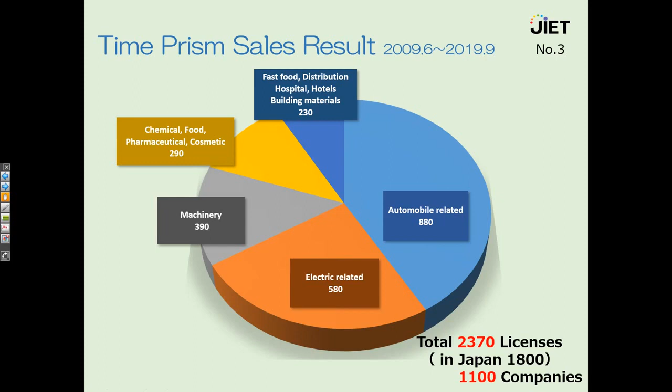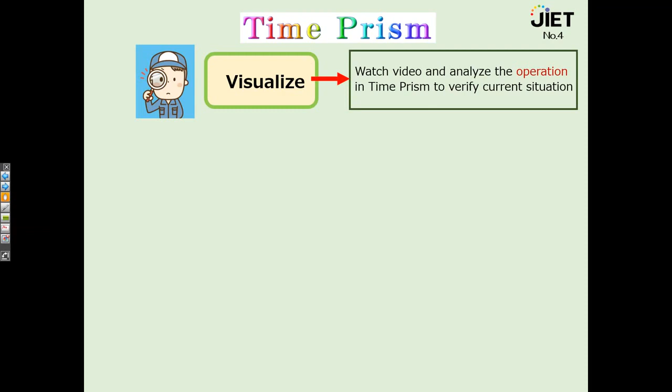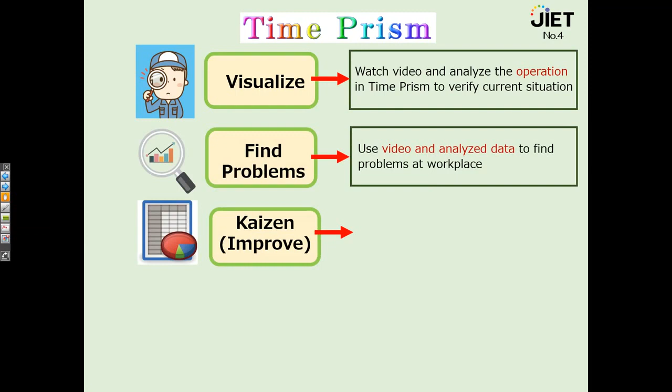How do we use Time Prism? First, visualize: watch video and analyze to check the current situation. Second, find problems: see the video and graphs to find problems. Third, improvement: use video and data to do simulation to improve.

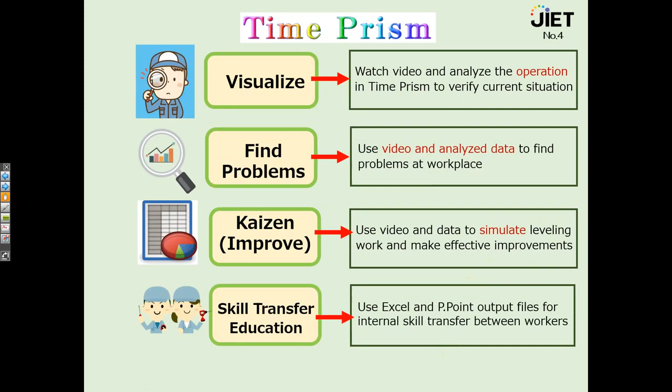Plus, one more important function of Time Prism is we can use it for internal skill transfer and education. I will show you its detail later.

Improvement process: first, take video of operation. Second, upload video to Time Prism. Third, analyze work element - this is very important. Fourth, classify. Once these steps have been accurately done, you have only to use the function of Time Prism.

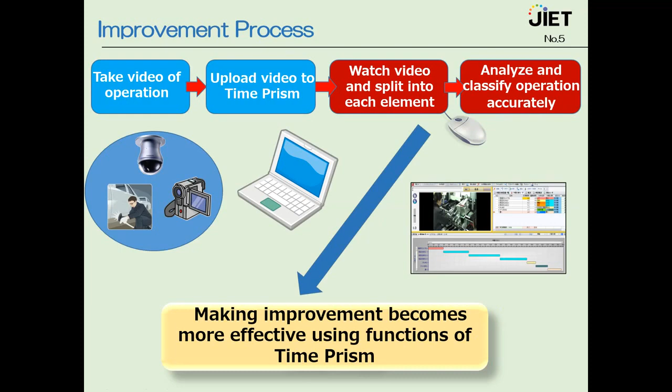Its functions are: number one, comparative verification, to compare two personnel or two operations by a side-by-side screen. Number two, work organization, to simulate and analyze for operation leveling. Number three, man-machine chart, to produce a standard work combination table easily. Number four, output files - over 30 kinds of files are available to output in Excel and PowerPoint format.

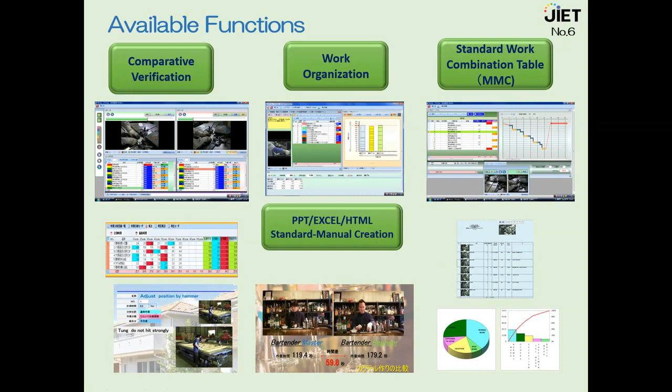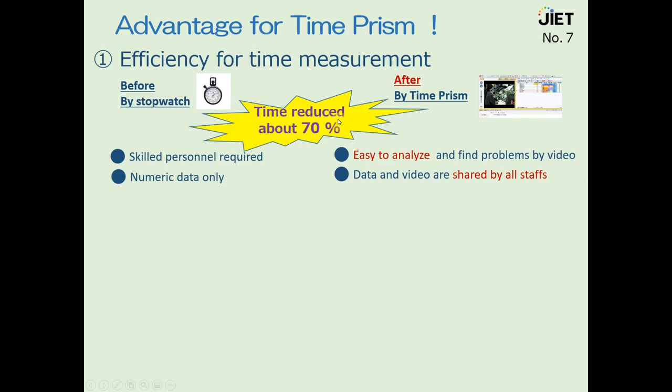Advantages of Time Prism: number one, effective analysis - the time for analysis becomes almost one third, and analysis is very accurate. Number two, easy creation of files - users can create various files easily.

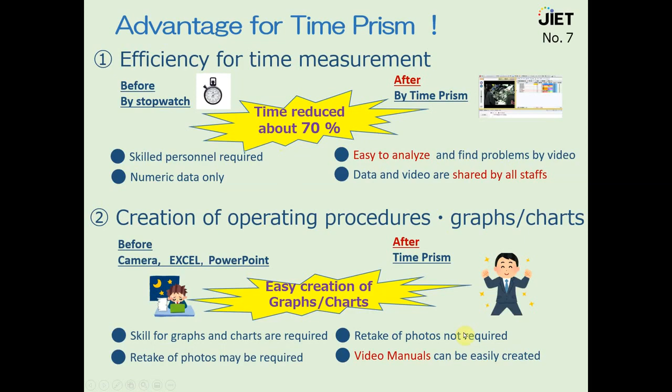Number three, this is the most important advantage: the reduction of losses. Depending on industry, losses have to be reduced or identified. Users should find a fatal loss to reduce and decide the target for Kaizen.

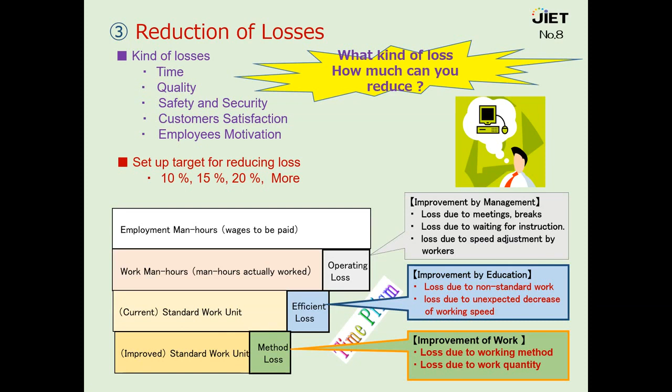I will explain the function of work analysis. Starting up Time Prism, a very simple screen with 3 buttons appears.

The red button is for analysis and normal output. The green button is for a new function, then simulation. And the right button is for initial setting. Click on the red button to start.

I prepared a video of PC assembling. Three ladies, Miss A, B, and C, are working together, and I'll use Miss B for today's demo. The video is now uploaded to Time Prism.

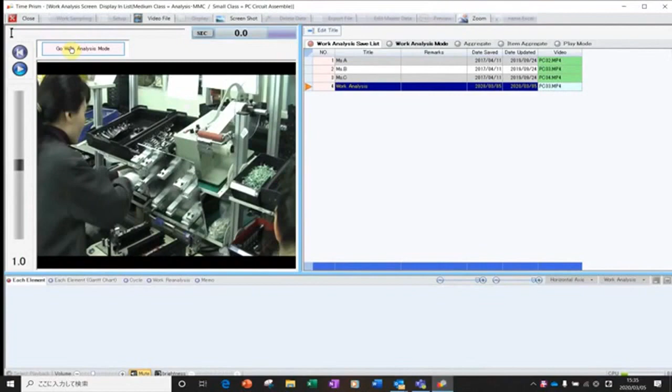Click on Start button, then the clock starts - this is a playtime. To start time measurement, place the cursor on the image and click.

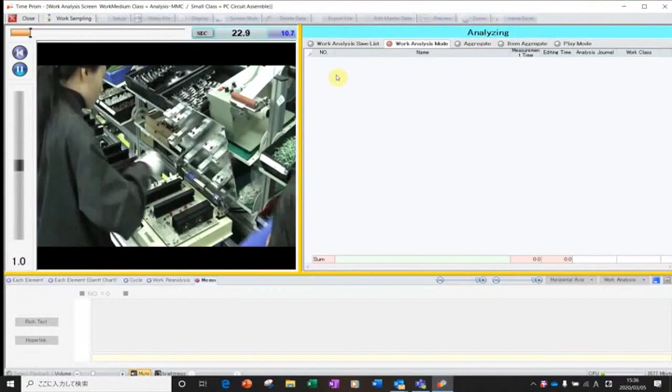Then another clock starts - this is the measurement time, and the analyzing sign is on. To stop the measurement, place the cursor again on the image and click. The measured time is shown here.

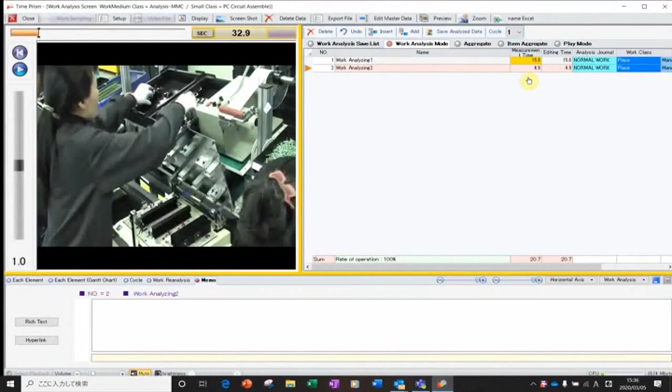15.8 seconds. I'll do it again - click, measurement starts, and click. Measured time is displayed here: 4.9 seconds. This way, measurement times by click operations are accumulated.

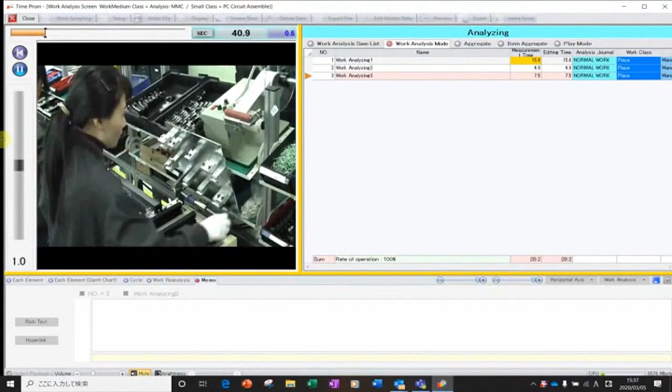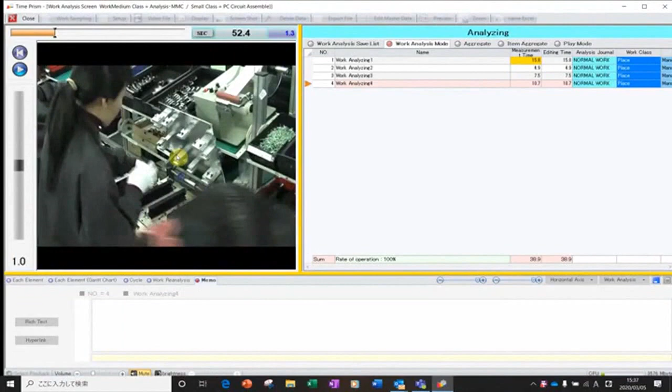Slow motion replay is available up to 0.1 times speed, and fast forward replay up to 8 times speed. Touching the mouse wheel here, you can stop the video during measurement and scroll back and forth to pick the right position to click.

Click on delete if you made a mistake, and you can undo the deleted element. This way, anyone can do the same time measurement very quickly and accurately by mouse click instead of a stopwatch.

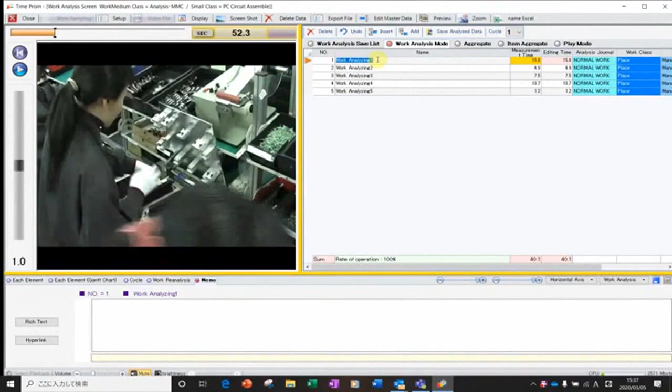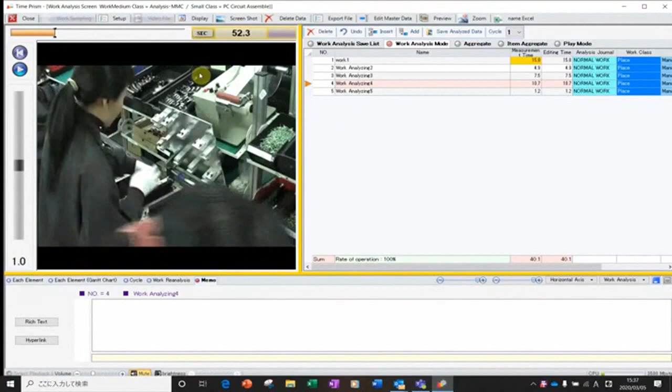I will carefully measure this video image again from the beginning using these functions. The video is in the middle of operation.

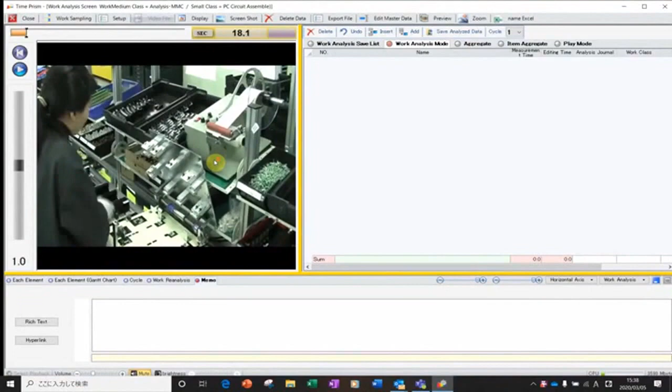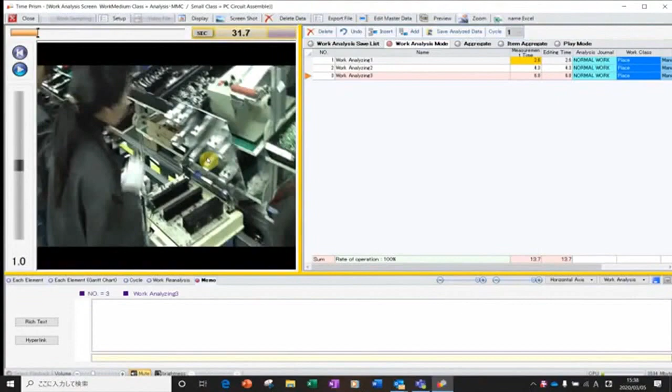Install third parts. Caulk, label, and remove the board. Operation starts here - click. Set the board. Install first parts. Second parts. Third parts. Caulk, label, and remove the board.

The video was split into 7 work elements with a simple click operation. Frame by frame playback and rewinding are controlled with the mouse wheel, so the measurements are very accurate.

What you should do next is input the name of the work. You can input it directly or copy and paste from your Excel file.

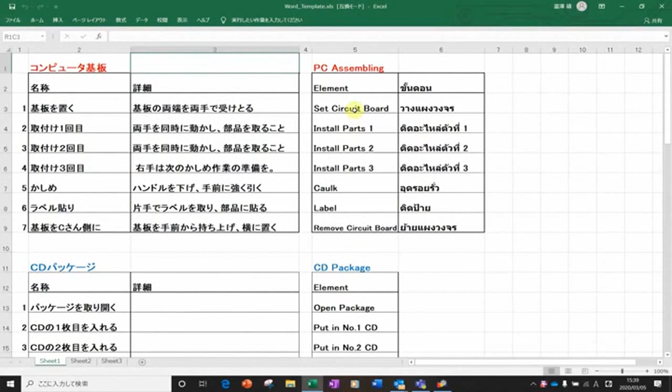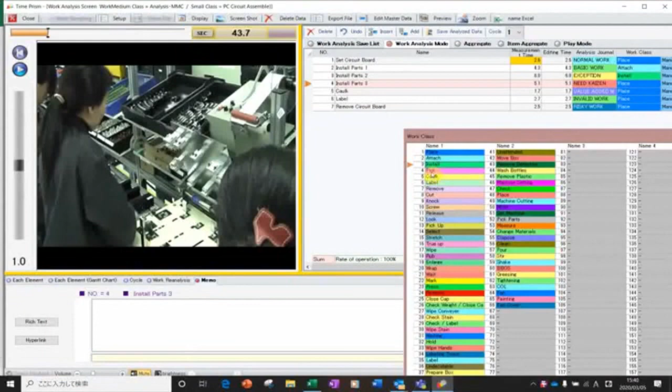Clicking here, Analysis Journal on the first element, a box with 9 analysis journals appears. Users can put in their own sorting names in advance. Clicking on Work class, a box with 200 work classes appears, and users can also input their own names of works up to 200.

Click on Next Group in case the user makes a man-machine chart. You can pick up one from 3 items: normal work, wait, and walk. This way you can sort out all work elements and separate them by color in a short time.

This is almost all which you should do. Once this job is properly done, we have only to utilize the function of Time Prism.

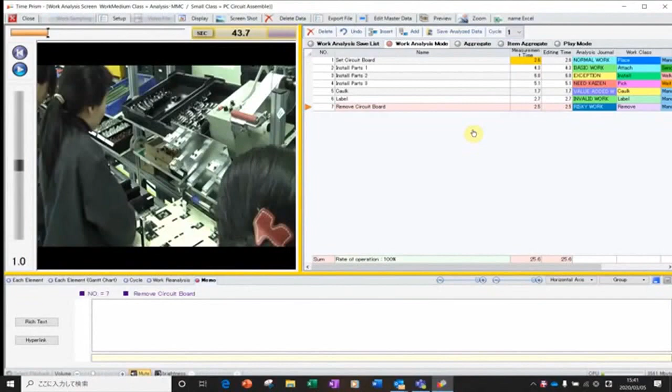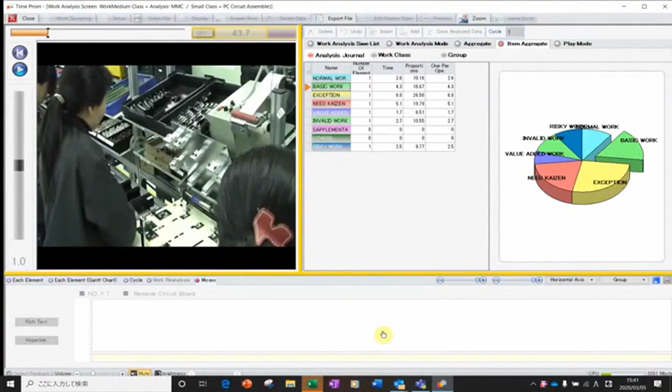At this stage, click on Item Aggregate, and a pie chart of this analysis appears. Let's output this table and chart in Excel format. Table, pie chart, and Pareto chart are output.

Users can sometimes visualize the current problem in operation. The Pareto chart is very useful.

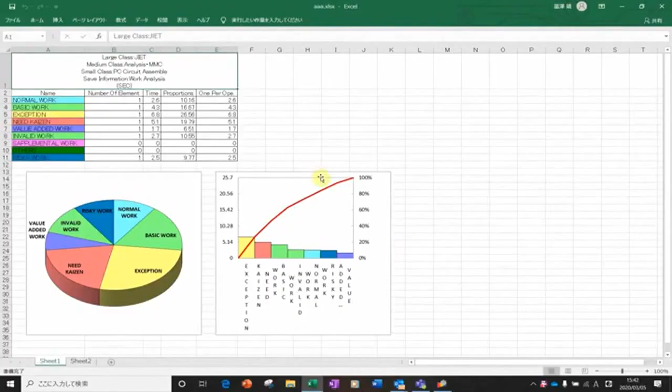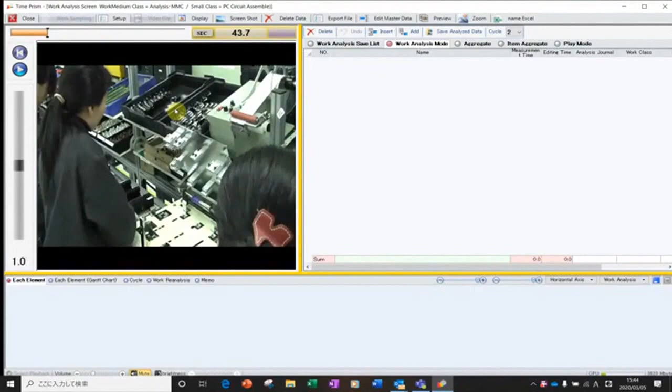For the repeated operation, change the cycle to number 2, and we measure repeatedly. As you see, the same sorting and color separations are reflected in the next cycle, up to 10 cycles.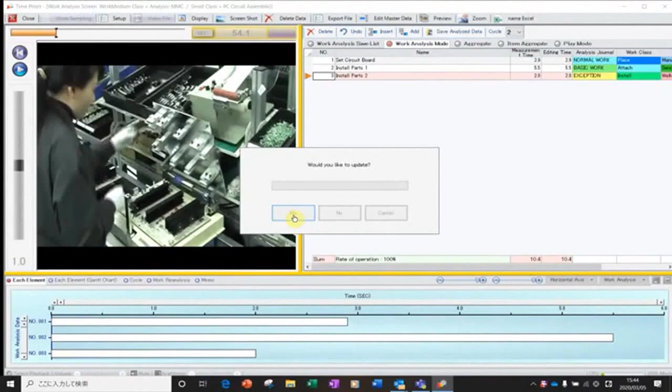Actually, this lady, Miss B, did the same operation 7 times. This chart shows the time over each element across 7 cycles. These figures in green are average, in blue are minimum time, and in red are maximum time. Let's again output the file in Excel format.

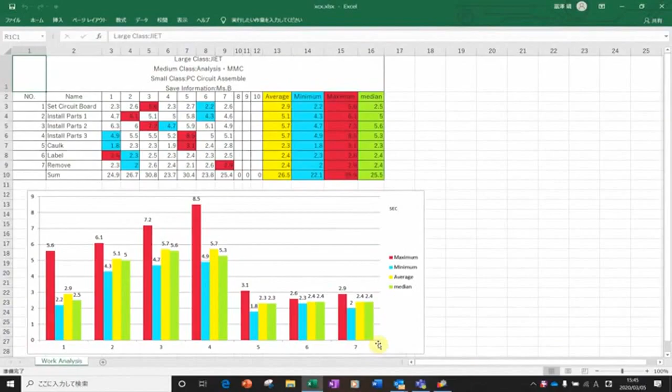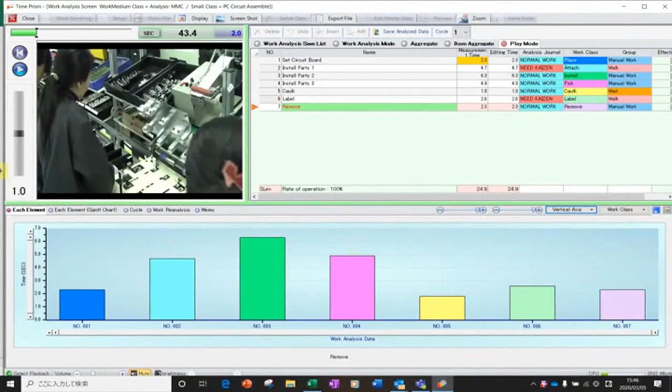This is also another useful file to visualize. Look at the lower part of the window. These charts are created at the same time as work analysis, and can be changed vertically and horizontally. Each element shows the time of each element. This is a Gantt chart, very useful for process control.

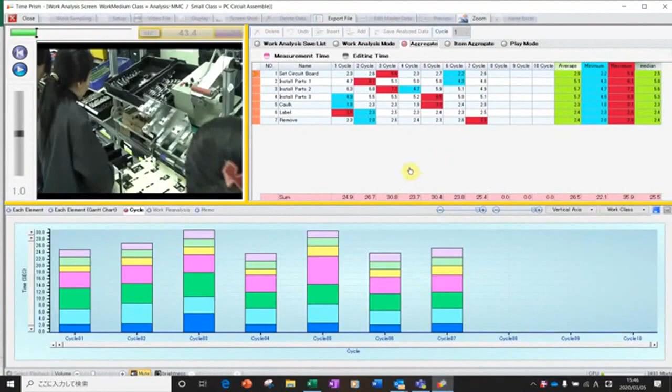This person did the same work, but each cycle time varied. The user can check the chart and look back at a video of each element of each cycle. And the memo, you put an important point to make note on each element, which is important for making an operation manual later.

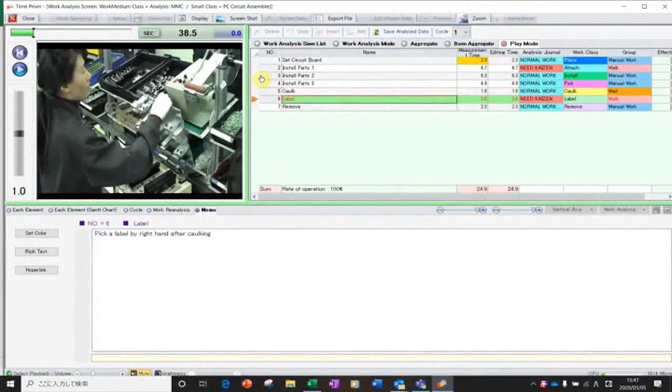Okay, let's output the file again in Excel format. Now, the first element, set circuit board, is in green. You can select the position of a still image from the video where you want to output, and do the same for all elements. The image of the output, we can see.

You can see easily, like this output.

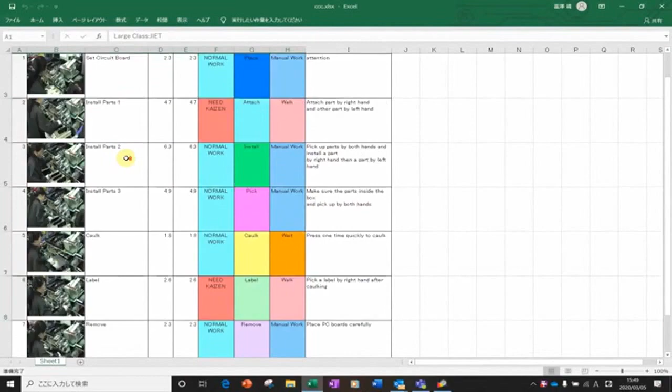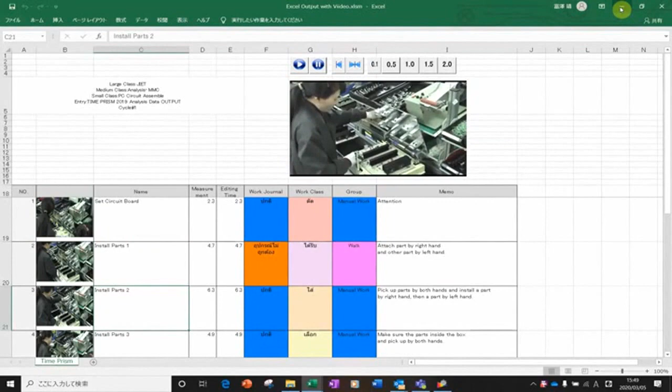One more new function we recently added: this is the same Excel file, but clicking the element, you can see the video of the element. Click install part 3, and you can see the video of install part 3.

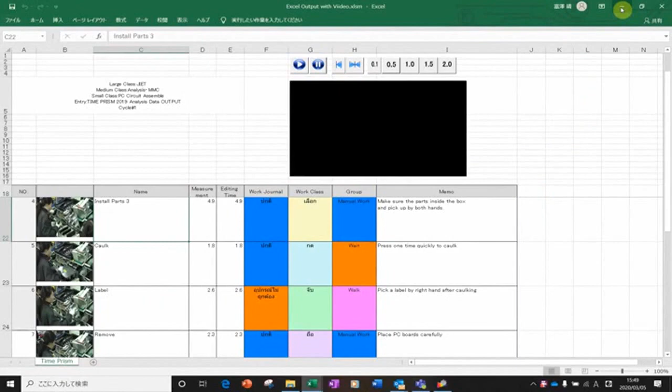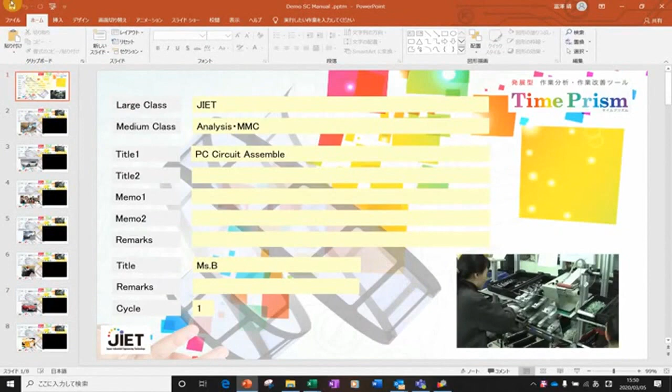And this is the PowerPoint file, with video and still picture. One more thing, the text can be seen.

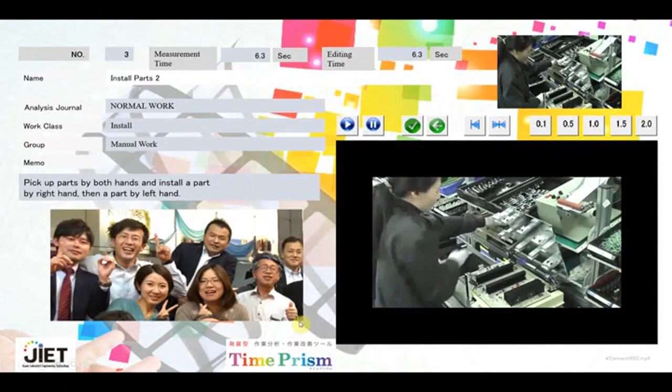What I explained was written on pages 4 and 5 of the brochure. You can do work analysis smoothly and accurately, and you can visualize the current situation for Kaizen. With accurate analysis and sorting, you can use the functions of Time Prism. Thank you.

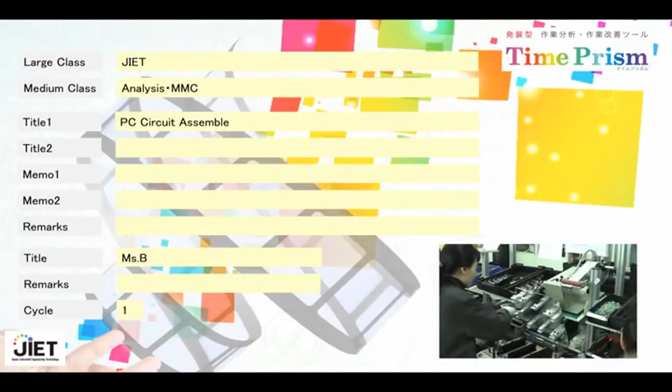I will explain the function of comparative verification, using the video of plate cutting to compare an experienced worker and a new worker by side-by-side screen playback. The left side is a 10-year experienced worker, and the right side is a new staff member. The operation is to cut 4 edges of an iron plate by a corner shear machine using a foot switch.

This analysis is done in the work analysis window. With accurate analysis, you can use the function of comparative verification. First, let's see both together at normal speed.

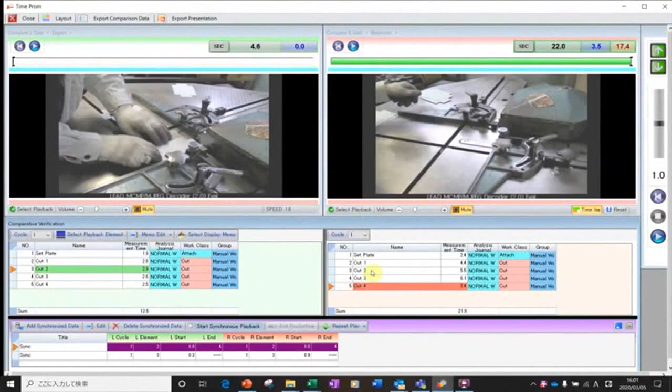Total time difference is 9.3 seconds. Let's see again at lower speed, at the element where the time difference is big.

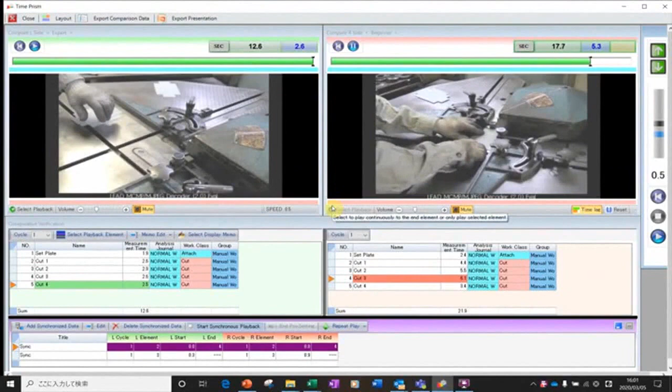As you see, the left person moved on to the next cut soon after the machine moved up. To the contrary, the new staff did not move until the machine had completely gone up.

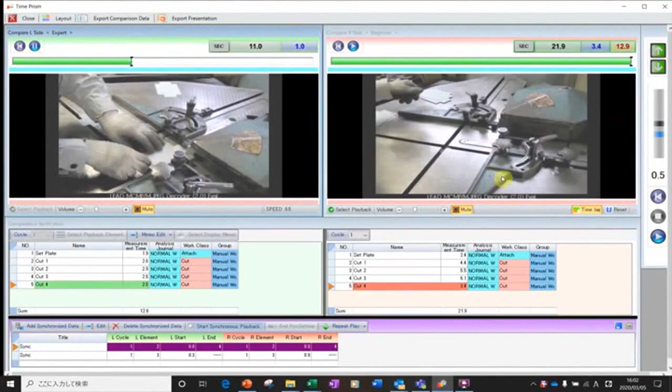The left person smoothly moved the plate, but the right person had difficulty due to a burr formed on the surface.

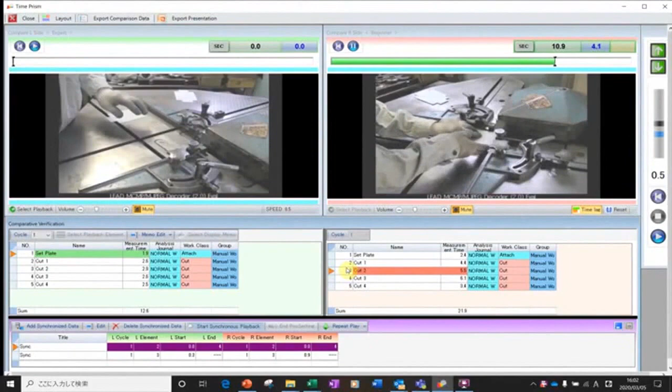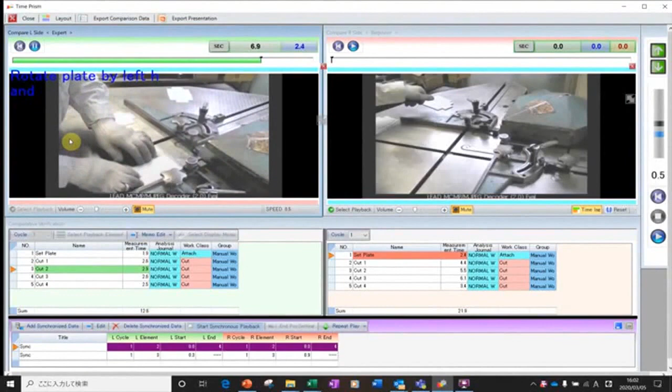Like this, you can compare by two screens. And you can also input a memo here, which is displayed on the screen. Output is available from this comparative verification window.

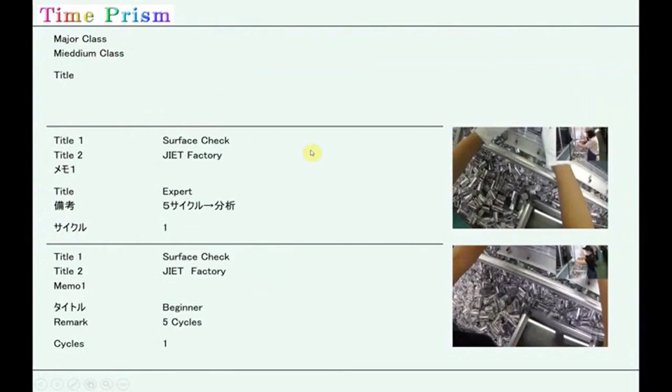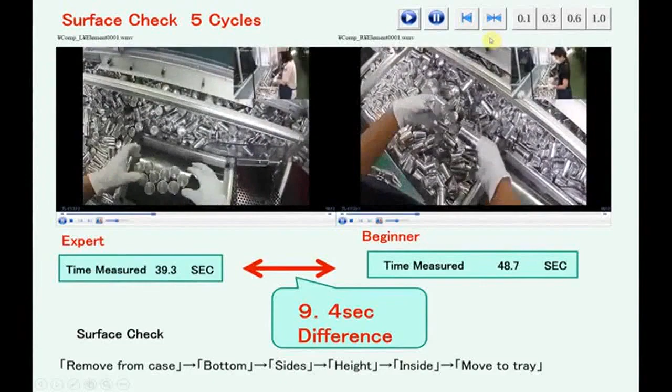This is another video, but you can see the image of a PowerPoint file. The left side is a very experienced worker, the right side is a new staff member. This is the function of comparative verification.

I will explain the function of work organization using video of PC assembling. These operations are done by 3 workers: Miss A, B, and C. I have just analyzed Miss B in the work analysis window, and also previously analyzed Miss A and C. First, I will list the organization chart.

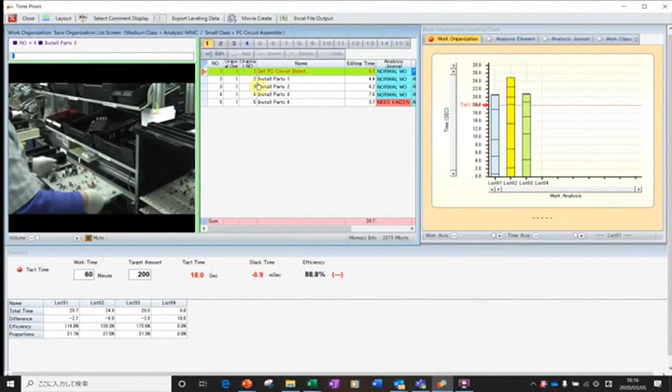This is the workload analysis sheet for the assembly line of Miss A, Miss B, and Miss C. As you see, this chart is uneven. Miss B's job is heavier than the others.

The function of work organization is to carefully watch the video of the elements where you want to see, and to do operation leveling. For example, do you remember the first motion of Miss B?

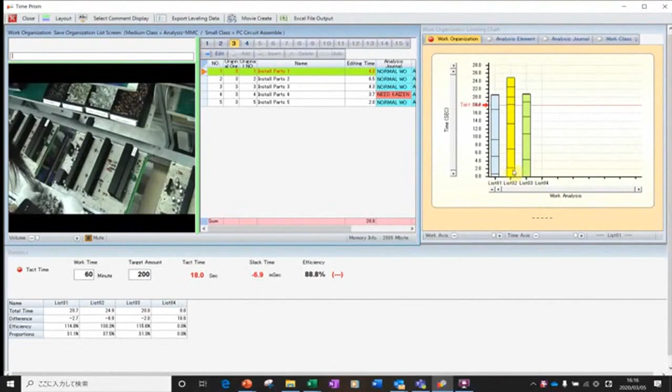Yes, it's set PC board. The second from the last motion? Yes, it's labeling. You can see the video on each element.

When I analyzed the operation of Miss B, I categorized these 2 motions as needing Kaizen. You can remove elements by dragging and dropping. Now I remove this element. Then the number of elements becomes 6.

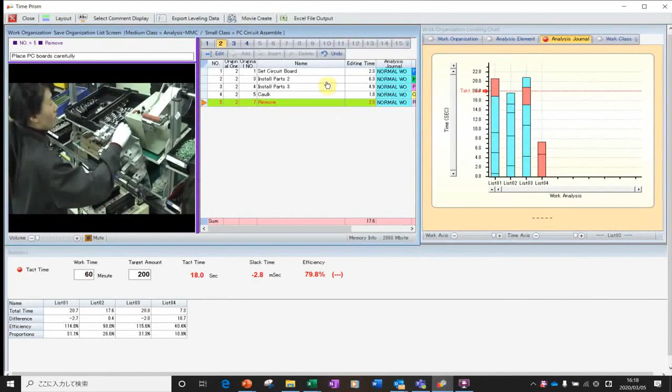And remove one more, labeling. The total elements become 5. Then check this new operation of 5 motions as a result of the leveling.

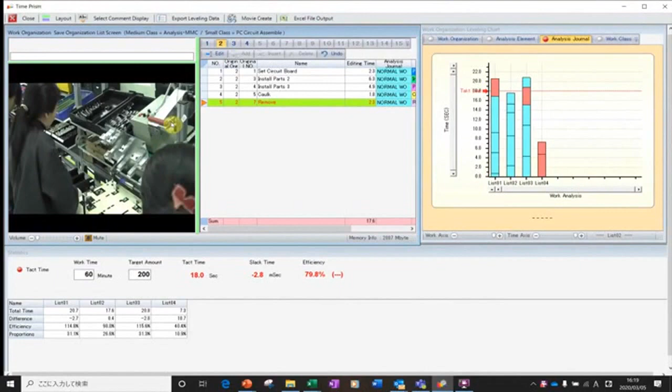Set board, install parts number 2, parts number 3, caulk, remove without leveling - it can be workable, like this. This is an image of the leveling. Like this, we can do operation leveling.

Please see the bottom half of the window. This is time and production, and the tact time is automatically calculated and displayed by a red line.

If we change the production number to 230 pieces, the tact time goes down. It means it's difficult to produce with 4 persons unless you increase time, reduce production, or add new staff. Various simulations can be done by the user on the work organization window. Thank you very much.

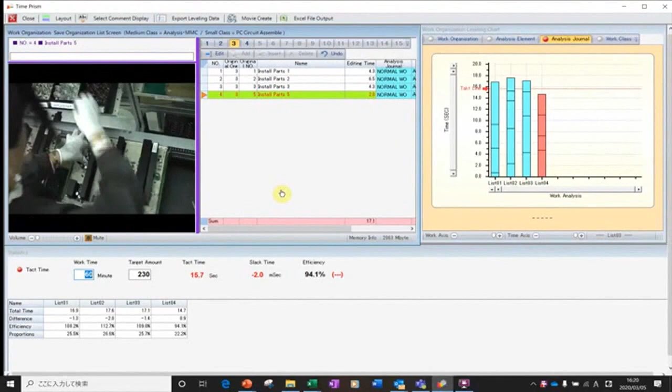I will explain the function of the standardized work organization table, called the man-machine chart, using the video of a lumber factory producing housing panels. This is a result of analysis. With accurate analysis, the function of a man-machine chart is available. Now the man-machine chart is displayed.

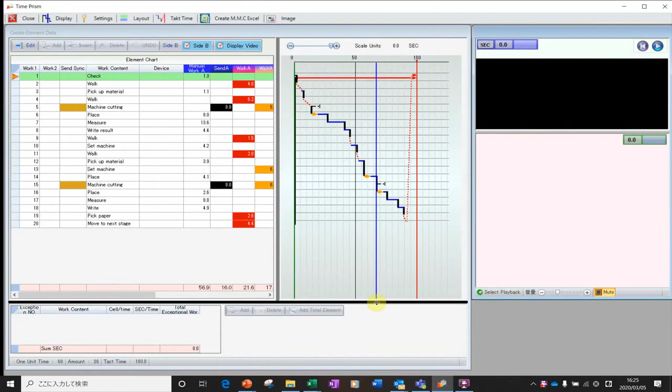The blue line is manual work, the orange line is waiting, the red dotted line is walking, and the black dotted line is set, which is a machine time set for 8 seconds. The production is set for 60 minutes to produce 36 sets, and its tact time is here, shown by the red line.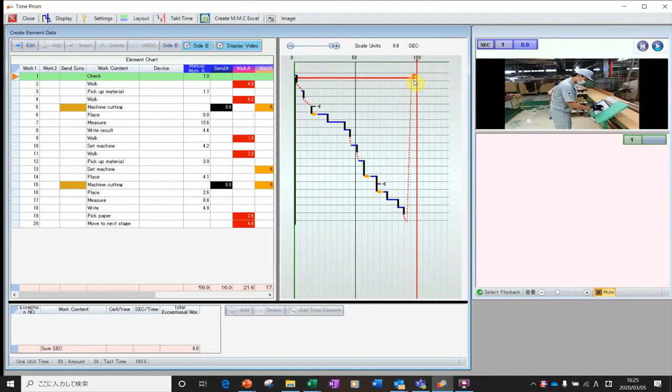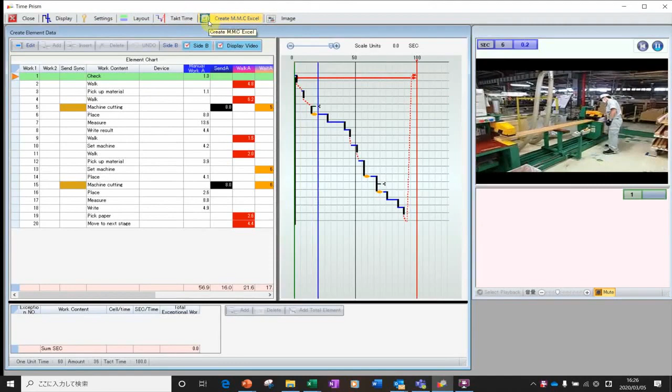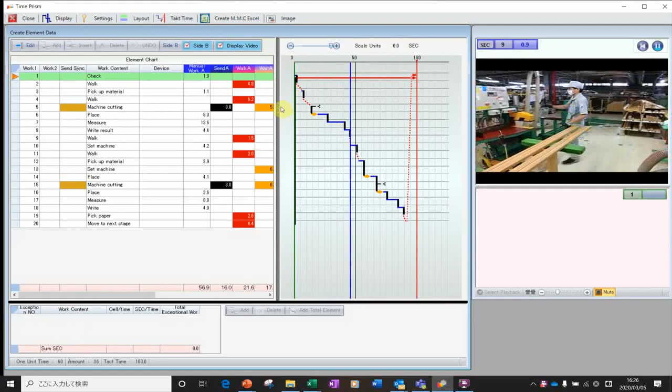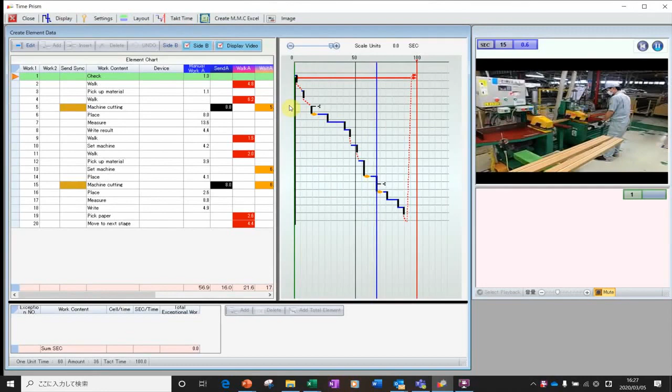Let's play back a video - the video and chart are synchronized. Probably you can see many points for Kaizen on this video. You can easily see the worker's motion with the chart, and check the losses and problems of operations. So many points for Kaizen, isn't it?

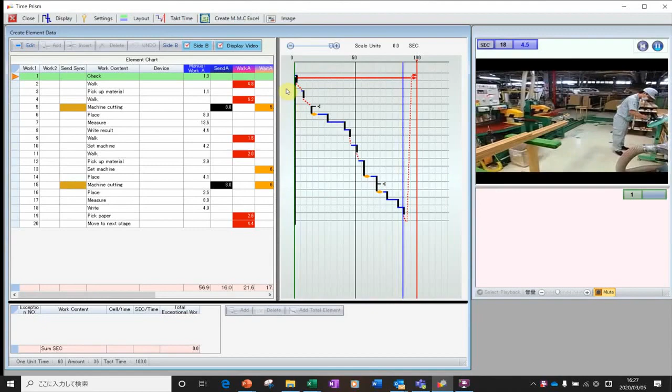On this man-machine chart window, you can display two analyses together to show two data sets and a video in the chart, or one analysis and one imported data set from an Excel file. The man-machine chart is worth using as a function while Kaizen activity goes on.

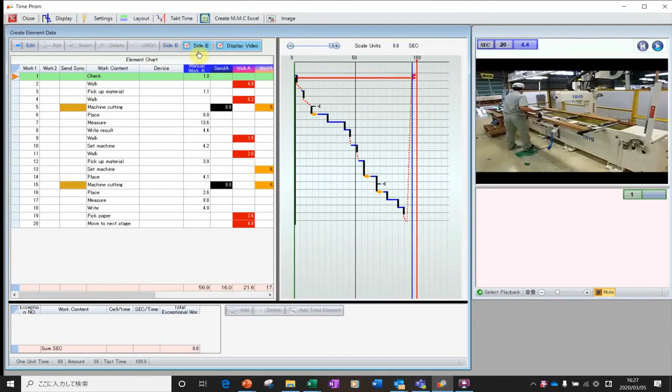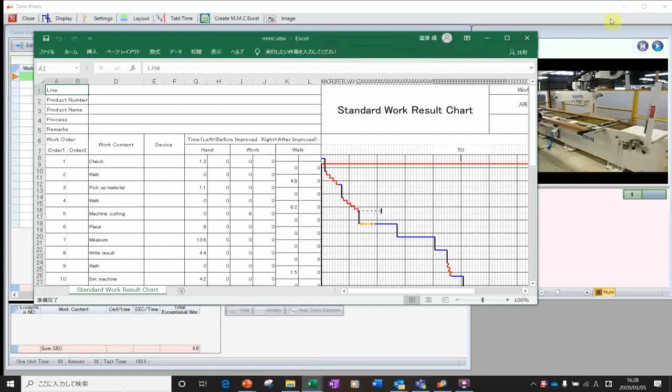It is easy to create a man-machine chart in an Excel file. We can show you now. By this operation, you can easily create an Excel file of the man-machine chart. Thank you very much.